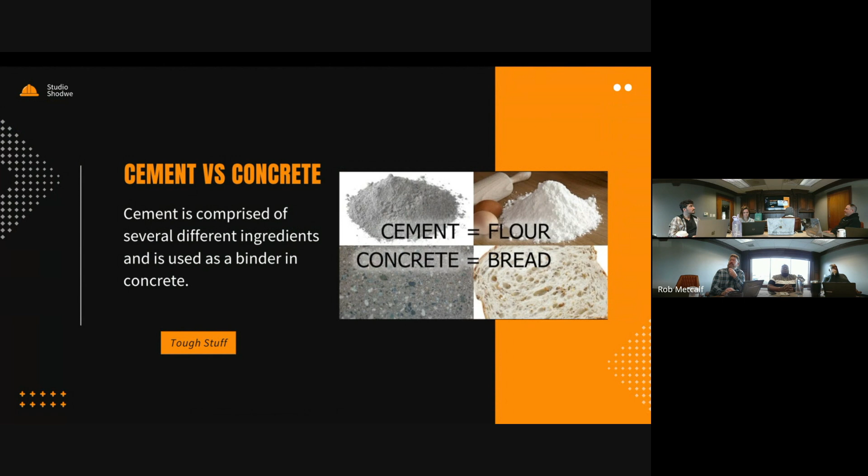Hydraulic cement. Sometimes people will call it hydraulic cement to sound important, but that's literally all the cement, all the concrete that people make is with hydraulic cement. There's water in it. Yeah, it requires dihydrogen monoxide. Yeah. So it's a chemical reaction when you add the water. The cement activates and then it basically turns into rock.

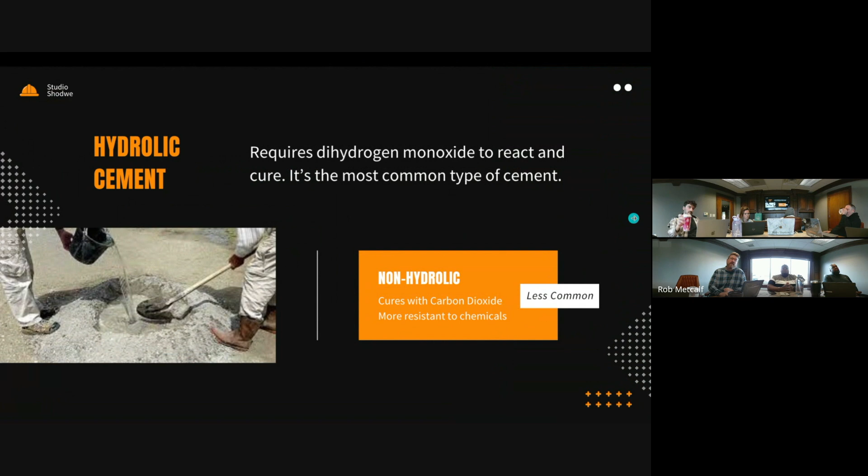There is a non-hydraulic that does not require water. It cures with carbon dioxide, but it's much less common, more resistant to chemicals, harder to work with, more expensive, et cetera. So everybody just uses hydraulic because that's normal.

Cure time. Once you pour your concrete and you treat it nicely, you can walk on it in a day or two. But you can't drive on it or put anything heavy. It takes a month roughly to get full strength. So there's a chemical reaction the entire time, and it'll actually feel a little bit warm sometimes. There's all kinds of factors that go into it, moisture being one of the biggest ones. So the wind and the sun will dry it out faster, which can cause problems.

Yeah, heated driveways are the bomb. The what? Heated driveways. We want to put heated driveways at the Airbnb, so we don't have to shovel. So our sidewalk and driveway would be heated. Okay. They're already doing it throughout the whole slab of the house. What if you do solar panels with that? True. You could do solar, especially since it's open. There ain't no woods over there.

There's not. Question before I forget. How do you go to the register of deeds to place liens on people's stuff? Can you walk in and just say I want to place a lien because I have this judgment against somebody? I don't know. I've never done it. I would think you just go to the courts and they'll tell you what to do. Construction and stuff like that too. No, I googled it. Don't worry. Okay. Monty's asking his ChatGPT. Moxie.

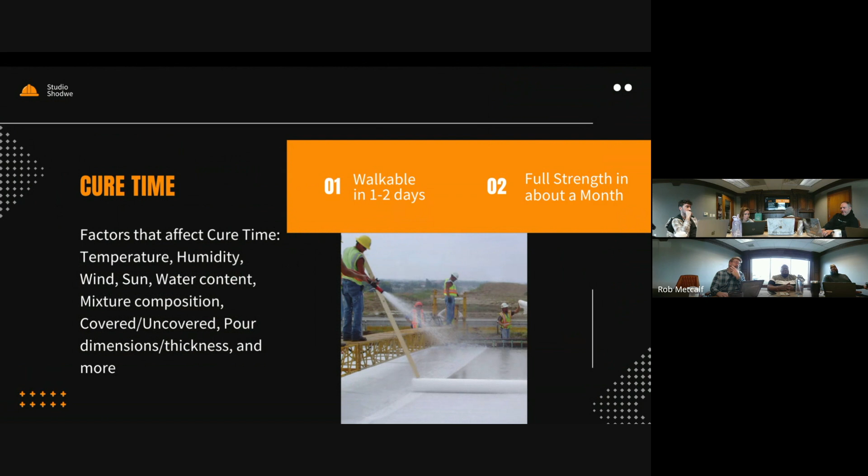So when your concrete cures too fast, there's a myriad of problems, primarily strength and cracking issues. You can pour concrete in the heat of the summer and the cold of the winter, but you got to take extra steps to be careful. Winter is harder than summertime. Summertime you can just cover it in plastic, make sure it's staying hydrated so there's adequate water to cure the concrete properly. In the winter, they have to add additives to make it set faster, which can sometimes yield a lower strength concrete, but it's possible.

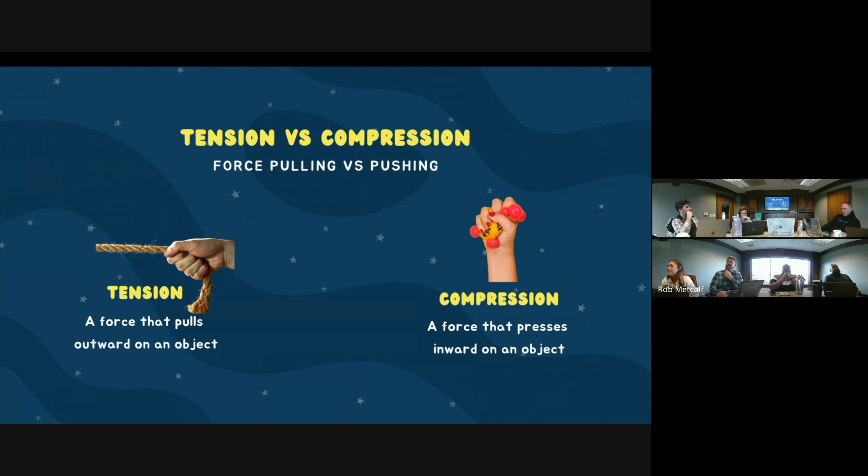Ooh. Surprise. Tension is a force that pulls outward on an object, and compression inward. Concrete sucks at tension. So if you've got a slab of concrete and it's being bent, it will deflect a little bit, but it'll more or less just snap. On the top, as it's bending down, that surface has tension on it and the bottom is being compressed. So it has tremendous load bearing capacity, but if you've got bolts embedded in there and they're being pulled, the tension is not great in concrete.

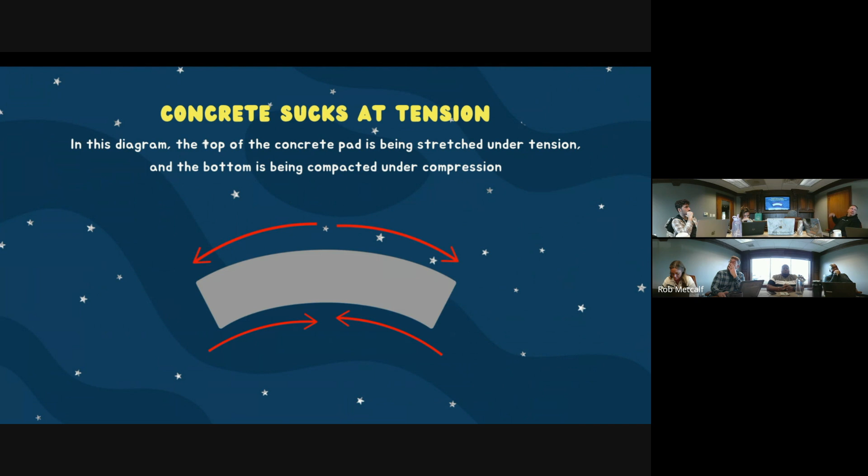Fun fact. There was a guy who invented how to mix rubber into concrete. Interesting. And the government of Illinois basically ended his company. It's too good. It doesn't break. Yeah, because that's how they get you, the taxes, as they come tear the roads up. That's like the government coming and taking his stuff back then.

Now there's a hydrogen car. Really? When was this rubber concrete thing? When I was in school for civil engineering. 20 years ago? Maybe more, like 25, 30 years ago, probably. My teacher knew all about it. I don't know all the details because it was 20 years ago, and I barely paid attention in class anyway. That's crazy. Yeah.

Should have Brad come in today and talk about concrete. Right? Why? He's a concrete guy. Not that Brad. Oh, I was like, Concrete Brad. Yeah. He's the guy who did our floors over the garage.

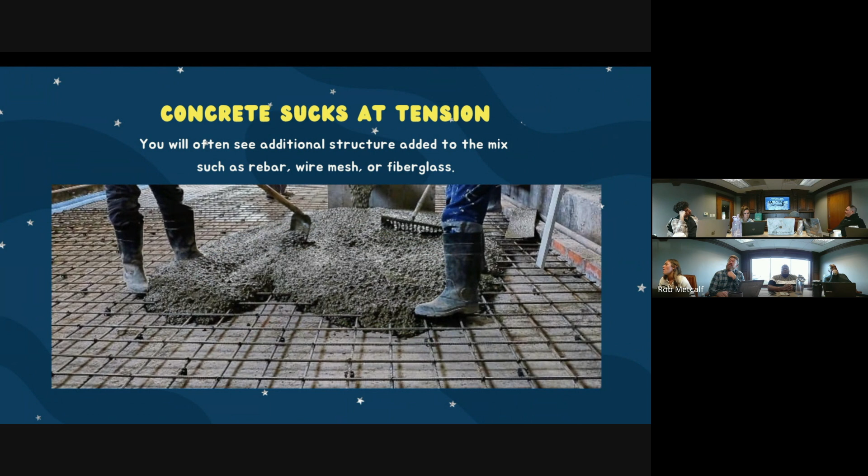You will sometimes see in sidewalks some fiberglass fibers mixed in, which basically is like a mini rebar, just a 1-inch piece of rebar essentially. So it's kind of slurried into the mix, and it helps strengthen the whole thing as well. Not a super high end strength thing, but it does help with smaller pours.

And it's rather thin, depending on the size of crack, but you basically are just injecting this epoxy into the crack. So you're on the inside of the house, the outside is already backfilled, it's an older house or whatever. You're basically just filling in epoxy all the way up this crack. You start at the bottom, you fill the bottom in, and as soon as the one above it starts to dribble a little bit, you cap off the bottom port, move up, and just work your way right up the wall. You're capping off as you go, and it's a pretty effective repair.

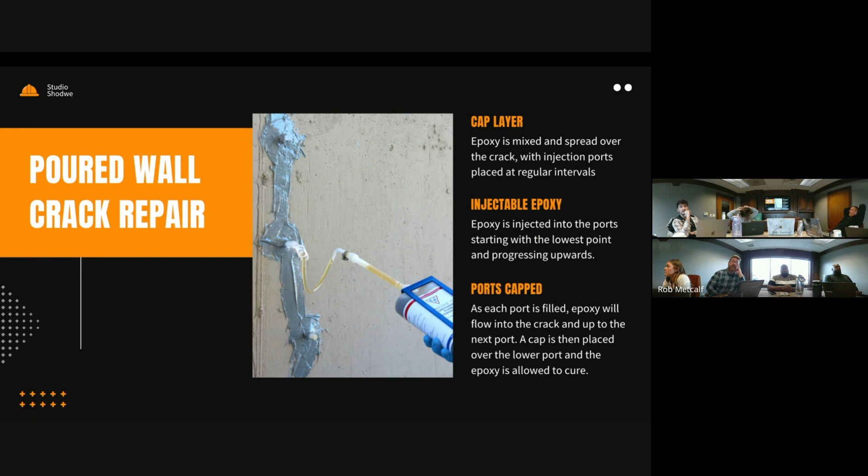There's other ways to do it. You can dig out the entire foundation on the outside of the house and seal it from the outside and put another water barrier, and it's a huge pain. Yeah, it's a huge pain in the ass.

If you've got a driveway with big cracks in it, or your basement floor, or your garage that you want to seal up, same kind of thing. You have injectables like we just saw, or you could just get a liquid epoxy that you can just pour in there. It's easy as that. There's different thicknesses depending on how big the crack is. So if it's just a small crack, it's very, very runny, almost like water, to get down into the crack, and then it just hardens up. This one is a pretty thick one because the crack is so large.

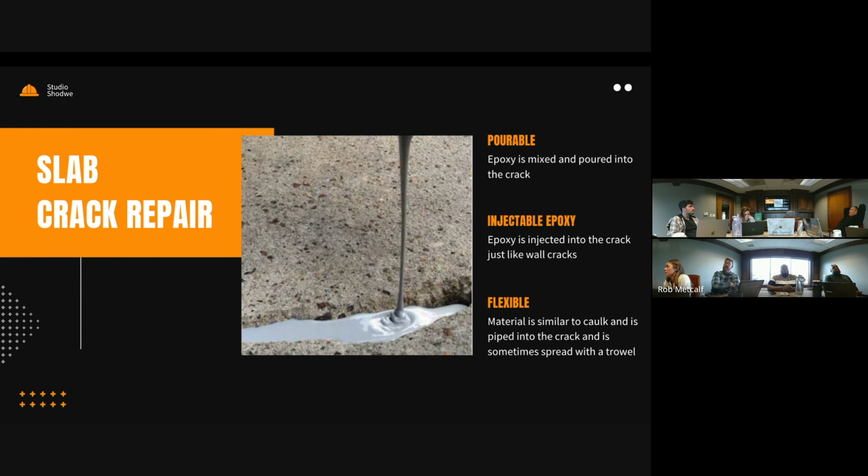Lifespan of concrete is super long. If it's done correctly and the foundation underneath the concrete is done properly, it'll last 100+ years. Romans were using concrete in their aqueducts and different things, and they did a bunch of research, and they found that actually, because of the way that they mixed it with volcanic ash, it's self-healing, and it's actually stronger than when it was poured originally.

That's crazy. Yeah, so as it cracks, it exposes the ash and the cement to more fresh water, and there's these little pockets, like minuscule pockets inside the concrete, and it's basically healing itself as it cracks. So it's all still functional basically. So they had it figured out. So yeah, if it's done right, it'll last a really long time.